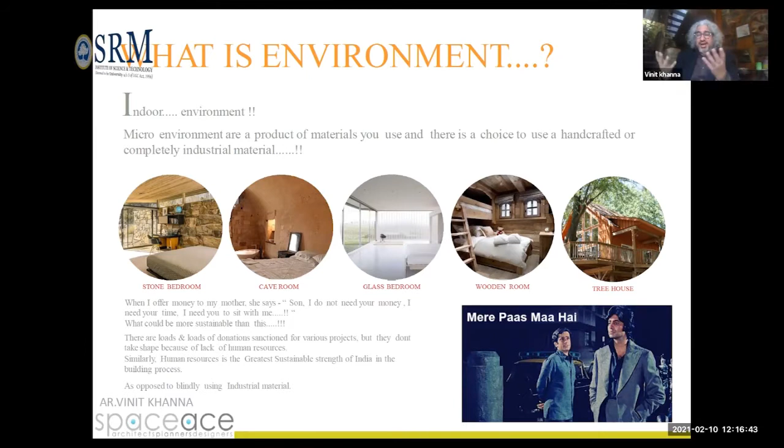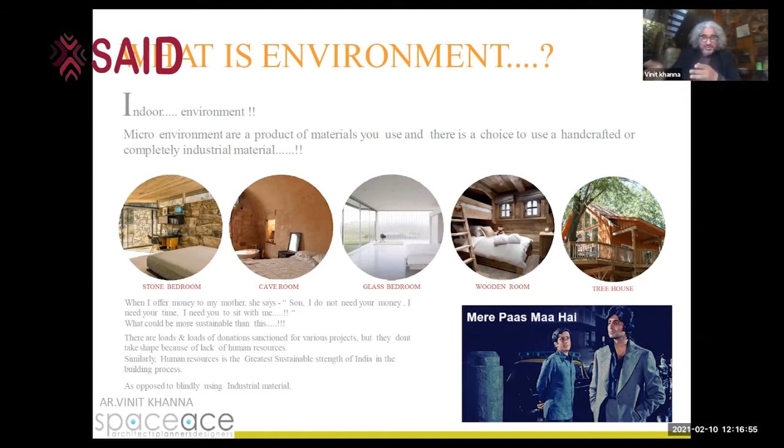When I did this presentation that time, Shashi Kapoor had passed away. And this time, Shashi Kapoor's nephew has just passed recently. So that's what I say - mere paas maa hai. Maa means the Mother Earth. If you have Mother Earth with you, you have everything, all the riches. Amitabh Bachchan in this movie said, I have bangla, gaadi and everything.

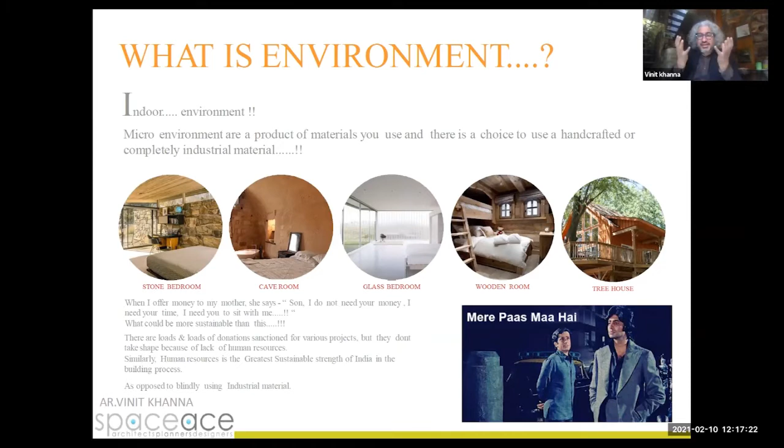But it's immaterial. And that's what I tell the students of architecture - putting in expensive materials or industry is not architecture. Jiske paas maa hai, jiske paas dharti maa hai, who builds with nature is the real connoisseur of nature. So this is it - kya aapke paas dharti maa hai?

On one side, you see a grandfather making a hobby session with his grandson, and artisans working with their hands. On the other side, imagine what my mason would think if he sees this robotic mason building a wall, and so many building materials being made - I won't name them - high pressure laminates and so many things that are processed and processed and processed in energy.

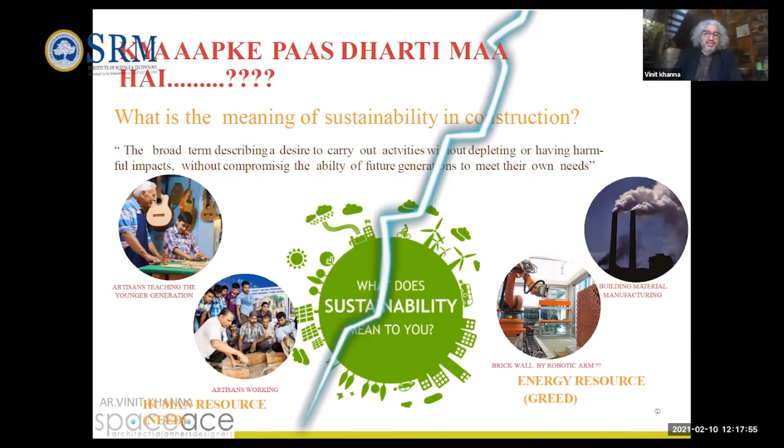So what is sustainability? I think the guru of sustainability has been our dear Mahatma Gandhi, who said I don't need clothes that need to be imported. So he started the Charkha movement and burnt all the clothes.

And of course, there is an element of need and greed, which is very important. Because if you build a building with what is required, then it becomes beautiful. But if you keep on - in fact, Delhi's worst houses where I live are the most expensive houses. So we need to understand need and greed.

And who better a connoisseur - one of my favorites, Sir Laurie Baker, who worked with sustainability, who worked with Mother Earth. I feel he's the father of the nation of the building industry. He could correlate from the Charkha movement to the sustainable movement - the sustainable movement that Mahatma Gandhi started, a foreign architect who studied outside could exemplify for us.

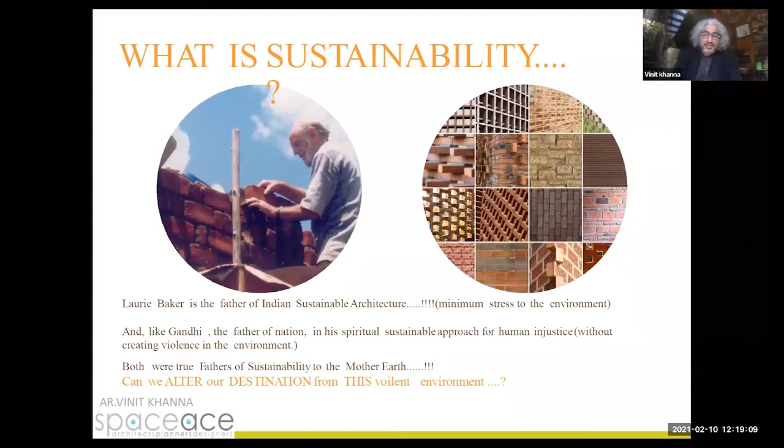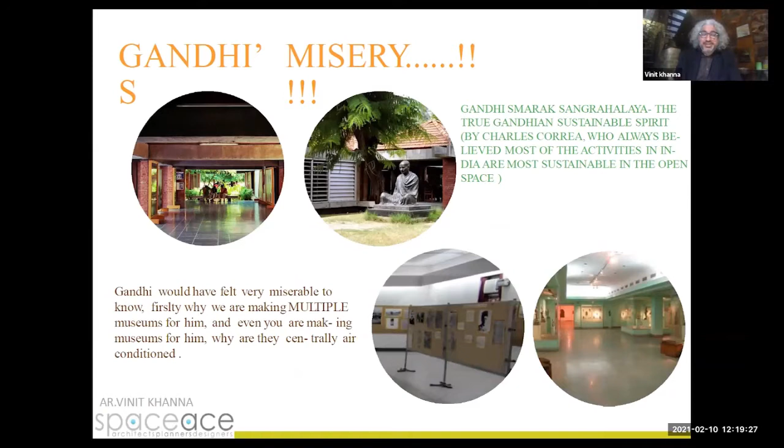So this is Gandhi's misery. We are also designing so many museums. The first museum designed by Charles Correa was not air conditioned. And now they want to make more Gandhi museums and put air conditioning in them. I think Gandhi would be the most miserable person - asking why are you wasting so much energy? Again, need and greed.

So we don't have a system in place when things are demolished. There should be a bylaw for demolishing a building. Of course it is done informally - when a building is demolished, the lakdiwalas take the wooden chowkhats, the stone people try to retrieve the stone and stock it. So there is a Kabadi Bazaar market, but it's not an institute. And this is what will save energy - recycle, reuse.

Again, think about cars - we are scrapping old cars. Has anybody thought how much energy is consumed in making a new car? So why don't we have a policy to change the car engine instead, since the car body and tires are all still new? Again, the emphasis is on helping the industry, not helping nature. Buying a new car does not help nature.

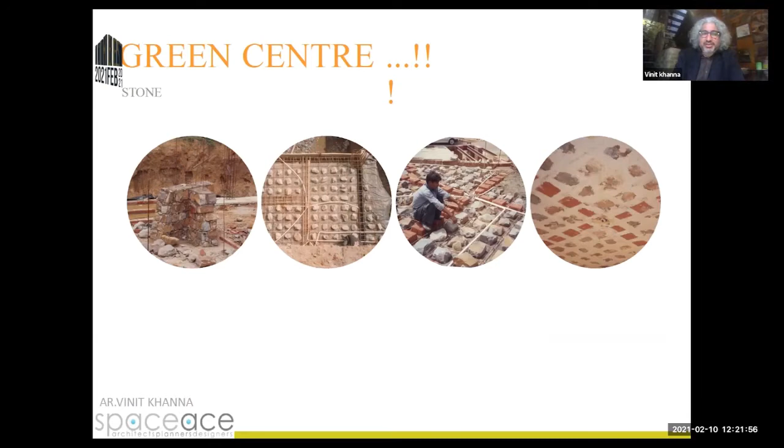This is some of the natural stone that is available, less of concrete. Of course, we have steel, but more natural stone. This is our den, this is where I am currently, and it's stone.

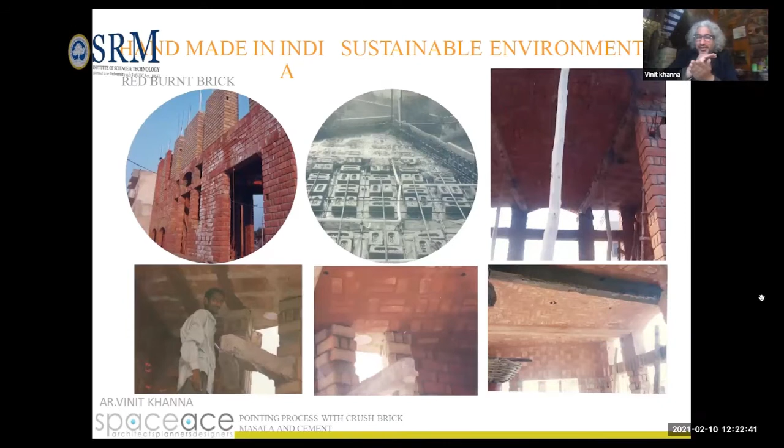Now, as we go up, we are using natural brick, and wherever we see concrete, we crushed the brick and did the pointing. So it's a red room, it's like a fire room. This is our kitchen area.

So this is how it looks, our kitchen area. Everything is fire, everything is on fire, everything is red. And the roof is all a self-supporting vault.

Rashi, can you point out the self-supporting vault in the center? Yeah, this is the self-supporting vault in the center.

And we've used a lot of light. Even if you see the cabinetry, there is light coming through. So there's a lot of nature, and nowhere in the house is there painting. That's of course the Laurie Baker model.

And I must thank all the people at the Laurie Baker Center who helped me do it - Mr. Padma Kumar, Mr. Siddharth Mitra, and two key people who really helped me, because thinking about it and not getting the right masons and the right technology, you're nowhere.

This is how the red, fire-desire kitchen looks like. Everything is on fire, everything's sustainable. Do it once and that's it.

Now my higher levels were built with mud. Whatever earth we excavated, we got a machine from the Tara Nirman Kendra where we compacted the mud, and I added about - there was a 7% regulation to add cement, but I added about 10%, and we started building.

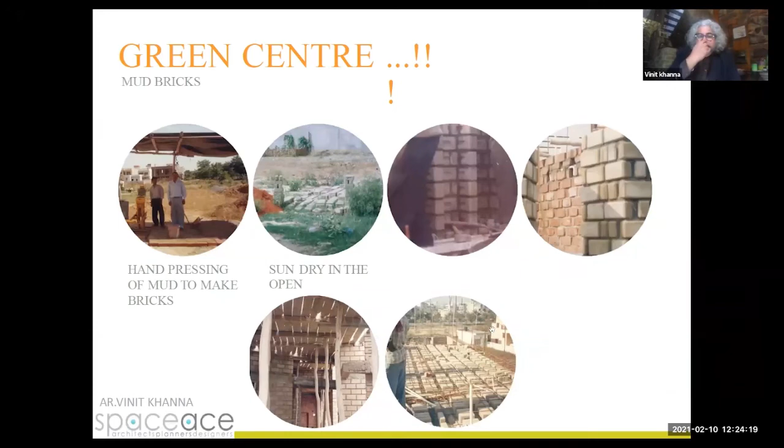And that's what you see at the bottom right - Rashi, can you point out? Bottom right is what you see, how we have a brick infill slab of mud bricks. Next, so this is what we did.

We had to work a lot hard in the shuttering. I had a lot of waste plywood lying around - my mother and brother have a carpentry workshop, so a lot of waste board was lying there. So I thought, why not let the bricks come down?

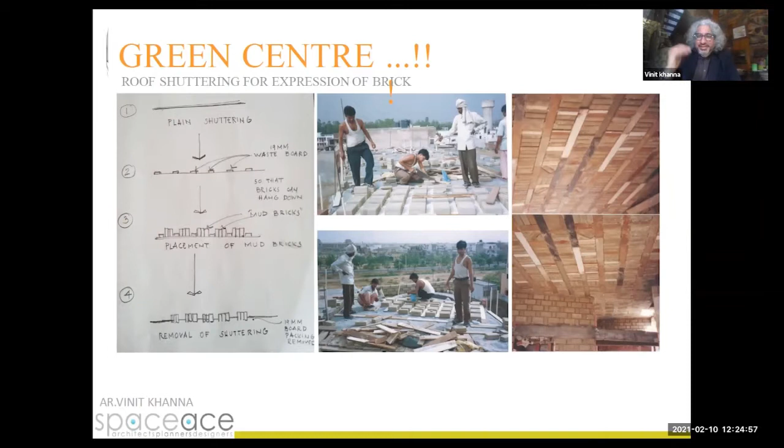So I spent a lot of time shuttering the whole thing and used all the waste boards to kind of dress these bricks in a linear fashion, so that you can see their face rather than seeing them flush with the slab. You see their little shape.

You'll see the end results now. So this is the shuttering process, and this is how the final output is.

So it's like a mud igloo. You can see the bricks have come down because you use the board to kind of elevate the concrete. And wherever the concrete is, we mixed it with mud, and we did the plaster and pointing.

So this is the kitchen. From the stone where I'm sitting, which is actually a mine development zone, from the kitchen which is all red and red bricks, to the mud brick zone.

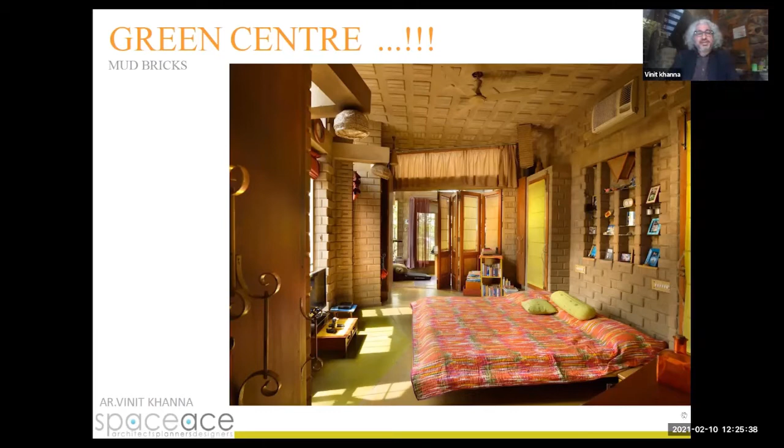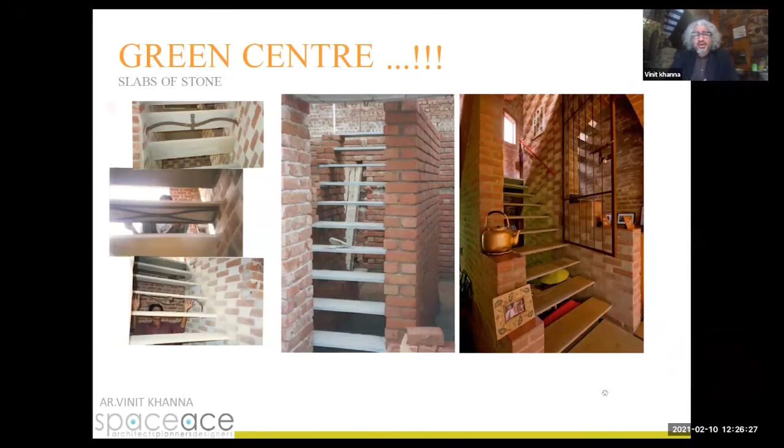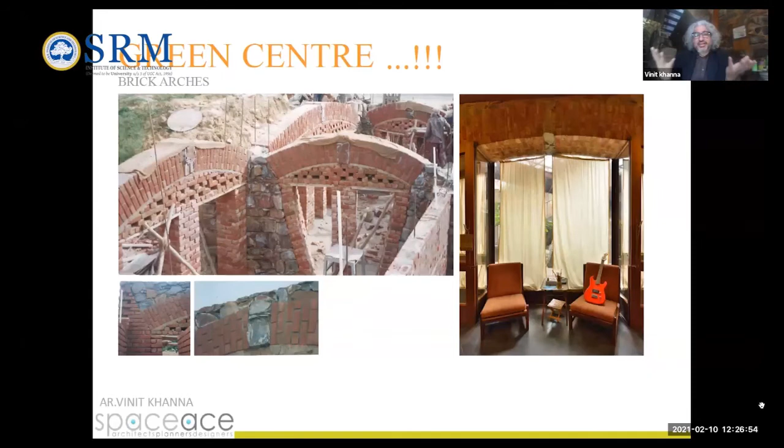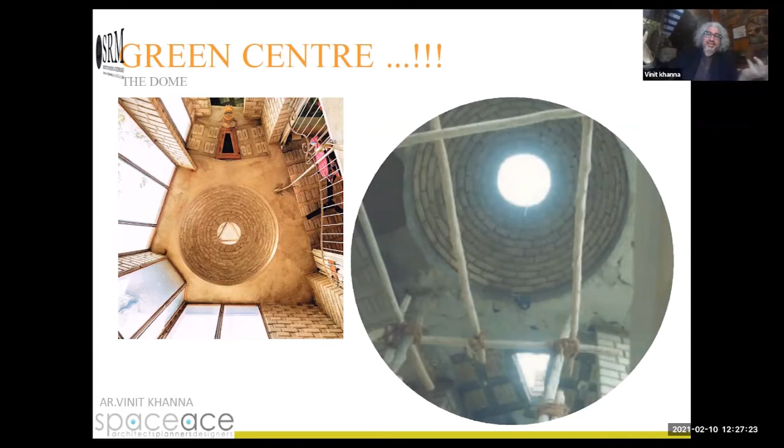It was beautiful. The vent you see there is for a desert cooler, which throws in air and keeps our place cool.

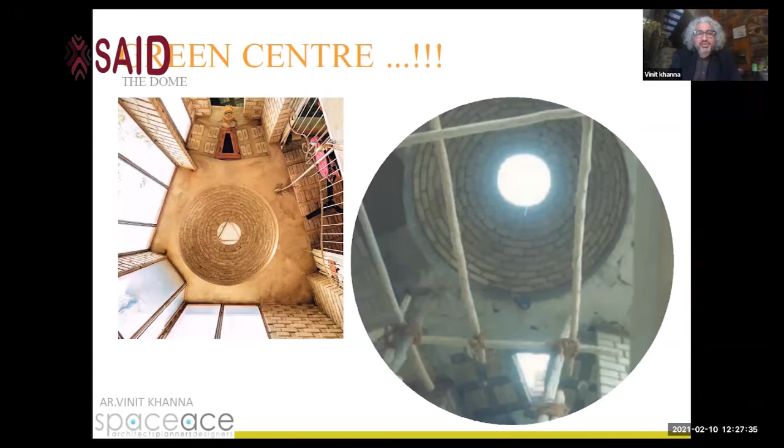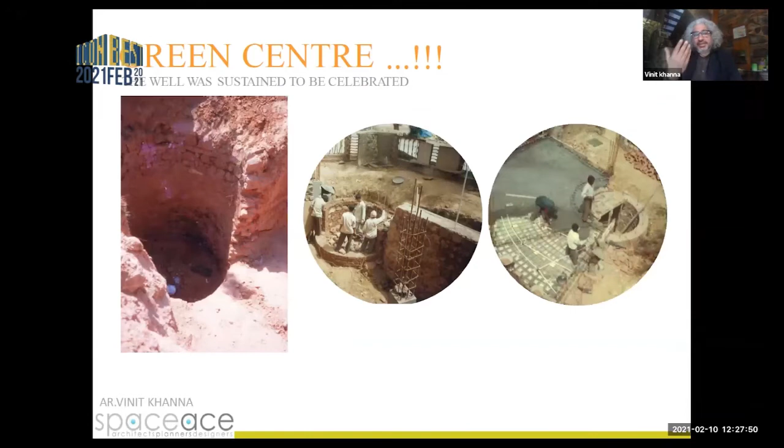Another exciting thing was we discovered a well here. So when we made our living room, we thought we'd make it circular. What we did in the living room was to express this. What you see on the right is the well.

We put glass on the roof, and we've used rainbow colors in natural tiles and natural stones to express the radiation of the water element, the well, into a rainbow on the ceiling. Of course this was a complete RCC ceiling, because being circular in nature, it's a little complex to have a brick infill slab or an RBC slab.

We used white cement plaster, so there is no painting in this house. No wall is painted, there's no painter. Even what you see below is also white cement plaster.

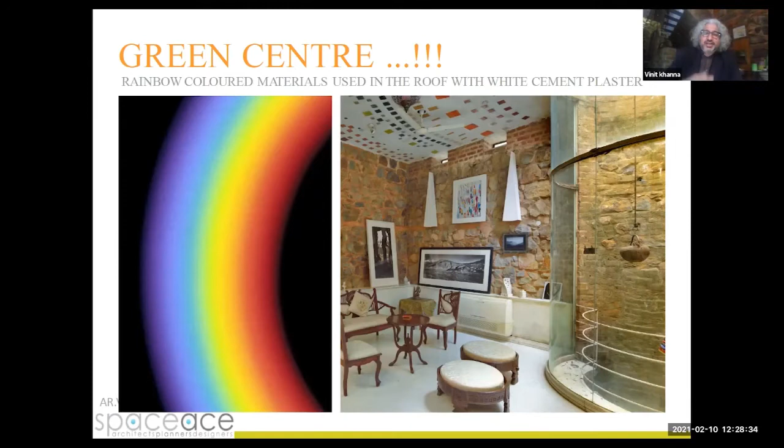Is this what our life is? So for our budding architects and professionals, what you see in the center is not what I do. In fact, I still don't know AutoCAD - I hope I won't be disqualified by all of you. I just know this little pencil and I can sketch.

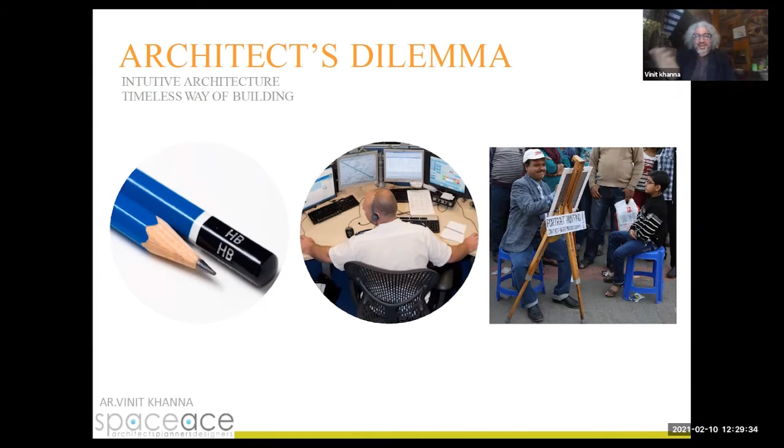So look at the options - one person with 4 screens, and then you have this. I've been traveling to a lot of places in the world, and wherever I go I try to make these sketches, that's my school drawing board. I presented a lot of these wall-hung drawing boards with adjustable angles, what you see on the right, and did a lot of sketching, from Taj Mahal to Jallianwala Bagh, which was one of our projects, to the Duomo in Milan, and all that.

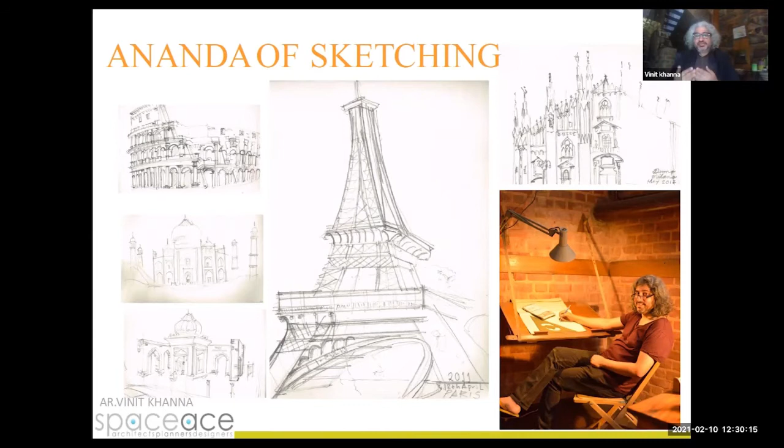There is a lot of joy in sketching. So I would request all the students to just think of sketching. Forget the internet, forget cut and paste. Look within - within you will find an abundance of creation.

So look within. Profession at the crossroads, sustainability of the Indian architect - some of the sad things. We're talking about sustainability as a whole. This was a sad day when we had the Hall of Nations going down. We have the Central Vista project coming up, which is completely disturbing the ecosystem of Delhi. I have been living in Delhi.

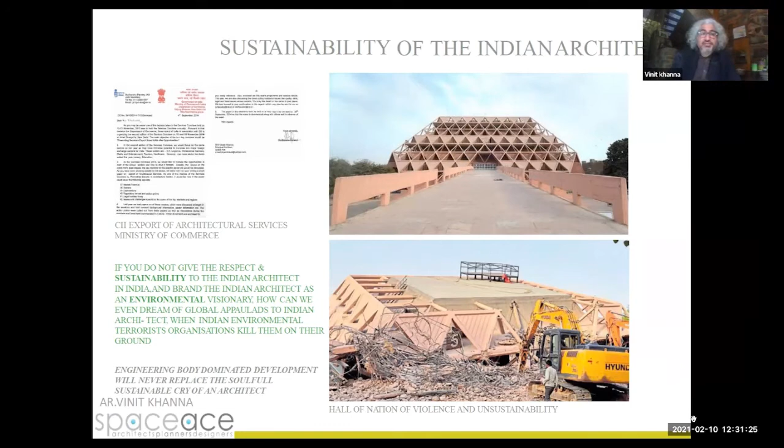There is sustainability of self, sustainability of what you build, and sustainability at a larger level, which we architects have to think about. Architects have to now get together and kind of shake the conscience of the people doing these things, so that we can go beyond personal interest to our earth and our planet as a whole, our environment as a whole. This is my journey towards unsustainability because of my social life.

So again, I'll say to Ananda we will start and to Ananda we will go. I like to end this with a piece of music, and this is what it is. Let us celebrate life - in fact we live in the open in most of the places, and I would just end with a piece of music, one of the songs.